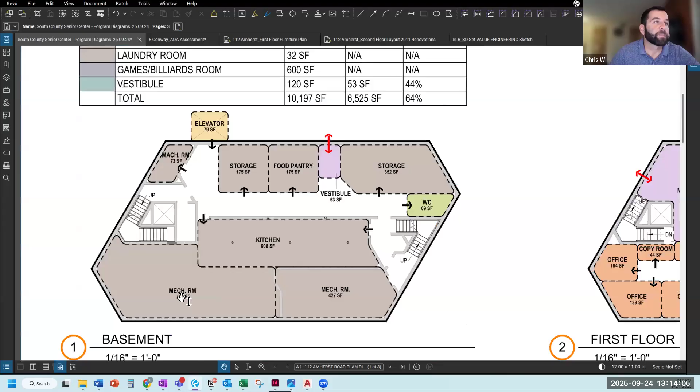So in the basement, the idea would be we would have some sort of kitchen, mechanical, storage capability that would fit out most of the basement. We could potentially put the food pantry in here.

But the big limiting factor down here that we were finding as we were starting to try to fit programmatic spaces in here is, again, just needing to put in more restrooms as soon as we start to put activity spaces in here. The basement only has one restroom. We feel like we could get away with that if it was mostly back of house staff spaces. But if we were to put a conference room down here that could fit 20 people or 15 people, all of a sudden the bathrooms start to become a little too limited.

So just this option, trying to keep it down, trying to find that fine line. But the basement, we were more or less trying to find the use for staff and for back of house uses mainly, with the exception of the food pantry.

You'll notice here that we are gesturing at potentially putting an elevator addition on the building. Our opinion is that if we need to go down the road of upgrading the elevator, it would be much more cost effective to put a small addition on for an elevator as opposed to tearing out the existing elevator and trying to expand the existing footprint. We've done that in the past, and it is not a cheap endeavor. We've done it for other reasons, whereas in this case it seems like there is a pretty good spot for an elevator to fit, and the site doesn't really restrict us.

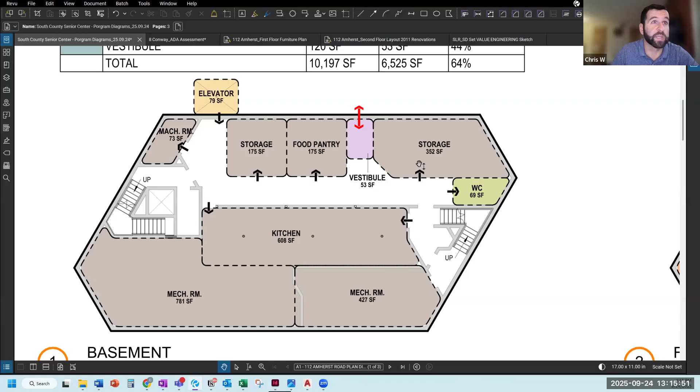So in this case, we would recommend putting something off the side of the building. And as you'll notice, when we go up through the building, it does seem to land in a pretty decent place for utility usage. So the idea here, like I said, is the basement's mostly staff. You go up to the first floor.

Before you move on - sure. How come, so with the mechanical rooms down below, when we had gone through before, was it not feasible to have the kitchen on the exterior section, like we talked about, in a smaller scale for that with the mechanical room?

I guess I'm not quite sure what those are for, because on the other end you have part of the storage room now for the water closet down on the right there on my screen. So I'm curious as to why that got moved that way.

I think in the end we can certainly push and pull the kitchen around, whether it's on the exterior or the interior. We haven't gotten into that level of detail with where it lands. I think just the point that it's in the basement is the main talking point I want to kick around. We can find a different home for it if it makes sense when we get into the nitty gritty, but the point of it being in the basement is what I want to focus on. It really requires over 1,000 square feet of mechanical space.

Some of the things that are labeled mechanical space were just like meeting rooms, with no mechanical stuff there. So what I'm hearing is that maybe this isn't the exact layout, but somehow there's going to be like 1,100, more than that, almost like 1,200 square feet of mechanical space that could be mechanical, utility, or storage. It's just kind of back-of-house space.

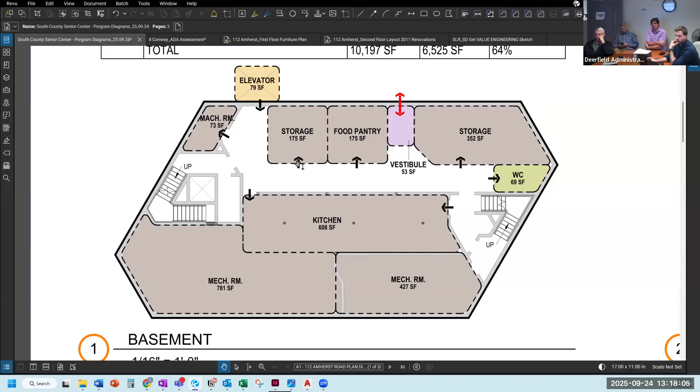So going upstairs, the idea here is the entry to the west would be considered the main entry. As you can kind of see here from the plan, we're assuming that the first floor is going to be made wide open. We were trying to save as much as we possibly could.

So the restrooms and the janitor's closet over here would remain, but everything else that you're looking at here was our best guess as to the best way to use the first floor.

So we were looking at a fairly open lobby where you could access restrooms as soon as you walk in. There could be a small waiting area, and you could have the elevator open directly into the lobby as well. There'd be a small staff area with reception accessible from the main lobby. So the main lobby gets you to restrooms and directly upstairs as well.

The stairs could remain open - you wouldn't have to close that stair off. We could fit 4 offices in here fairly comfortably, with a small copy area. Some additional bathrooms would be needed.

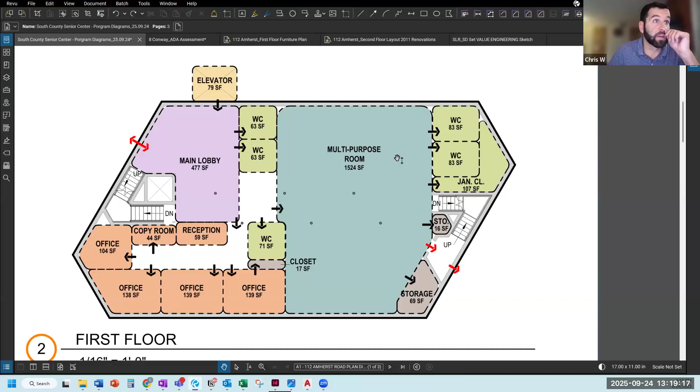We could potentially fit a decent sized multi-purpose room in here, about 1,500 square feet. The program called for, I believe, 2,400 square feet, so we're only at about 60-70% of what the program called for. But the idea here is kitchen in the basement, administration on the first floor, to be able to control that first entry point for folks coming into the building.

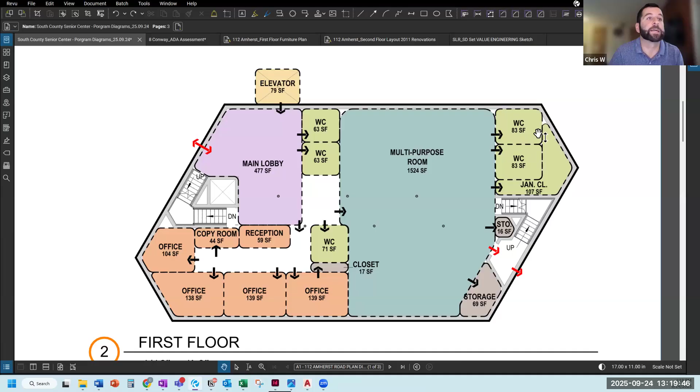Large multipurpose rooms connected to the kitchen as close as we possibly can, with most of the other activity spaces fit on the second floor.

So the second floor would have the elevator poking out into a corridor - a double loaded corridor connecting the staircases - and we can fit 3 decent sized activity spaces. We can chop them up however we want, with a 4th meeting space, but we've identified exercise, art/classroom, potentially a game room, and a fitness room. We could chop these spaces up however we want.

But the idea was that maybe we put all the other activity spaces upstairs, the main event spaces downstairs, to try to stay as closely connected to the administration area as possible and the kitchen as possible.

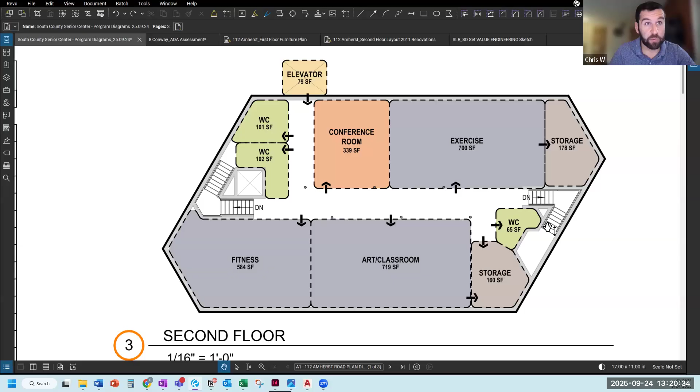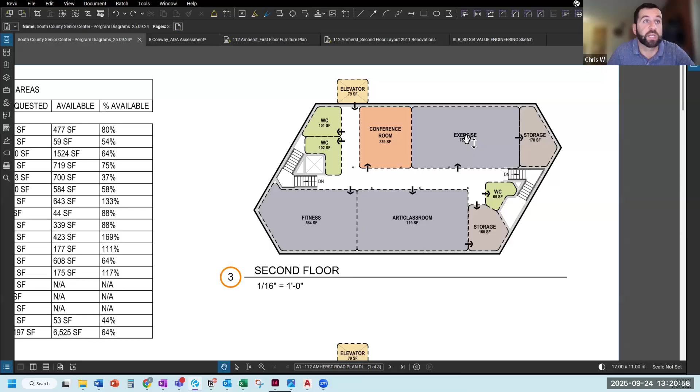Upstairs, we have 3 single-use restrooms. 2 of them are existing, more or less in the same location. We have to add 1 just to accommodate all the different bodies that would be up here. So again, we're looking at an option of how we could fit as many activity spaces as possible. In this iteration, we looked at what it would look like if we put a lot of them upstairs. Not to say that's the right thing to do, just looking at different options.

We put a chart in here too, and we can go through these one by one if you want, but from a comparison standpoint, we wanted to look at what the program called for and what available space we're identifying in this option. For instance, we called for 2,400 square feet for the multipurpose room, and availability is about 1,500 square feet, giving us about 64% availability of square footage for that space.

For instance, the game room—I mentioned one of the rooms could double as a game room—but we identified a separate game billiards room at about 600 square feet. According to the current layout, there's no room for it. So this chart is mainly to help everybody understand how this layout compares to what the program was originally calling for.

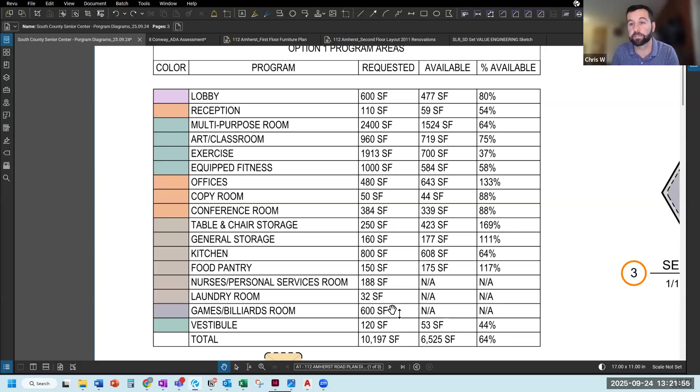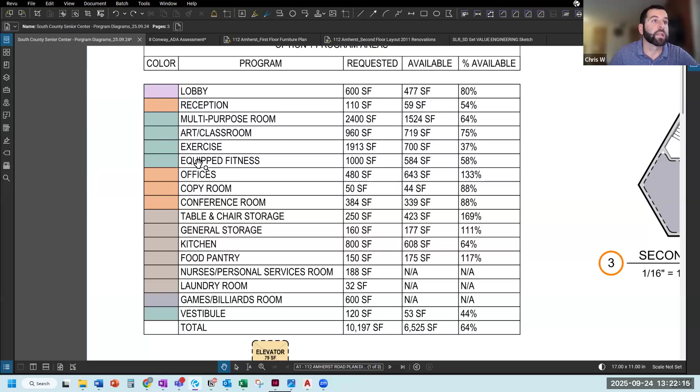Right, so you're saying, can you go back to that little chart? You're saying there's only 6,525 square feet out of a 12,000 square foot building available. I'm saying that of all the activity spaces listed here in the program, we added up to about 6,500 square feet.

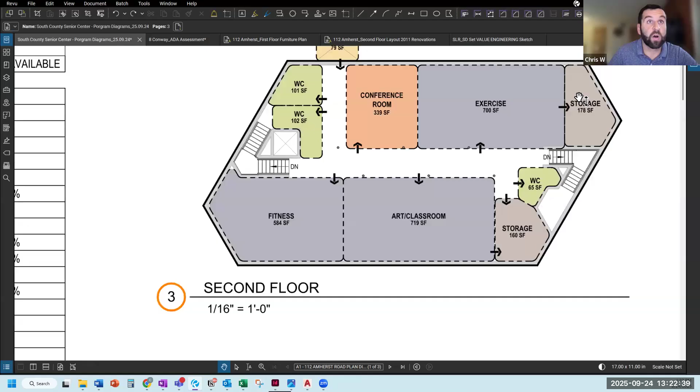Well, where did the other 5,475 square feet go? There's corridors, there's stairs, there's the elevator, there's all this storage and mechanical space that's not really called out. So it adds up in the end, but basically all of these purple and orange areas—the bathrooms aren't called out here in this area as well. So that's just how the numbers added up when trying to squeeze in all the different pieces and parts.

If we were to utilize the basement for program spaces, obviously that changes the math. We'd get a lot more floor space back, but that's just what the math is based on this conceptual layout.

Yeah, I mean when we were looking at the other two, when you did the feasibility study before, we didn't have this much mechanical room space in either of those. And that added a whole new kitchen.

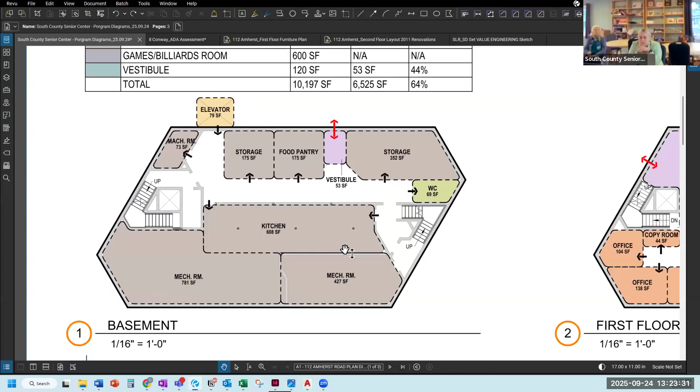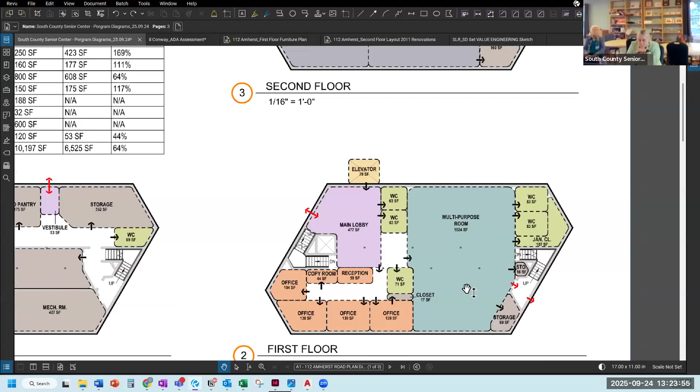Can you go back to the top floor for a second, please, since we don't have copies of this yet? Between the art classroom, which was not that big, we had a larger movement room, and we don't need that big of a conference room. If we've got a big lobby downstairs, we can go to the main floor where our staff offices would be. We don't have a nurse's office, which could be the fourth office there, and that could be moved closer to a bathroom.

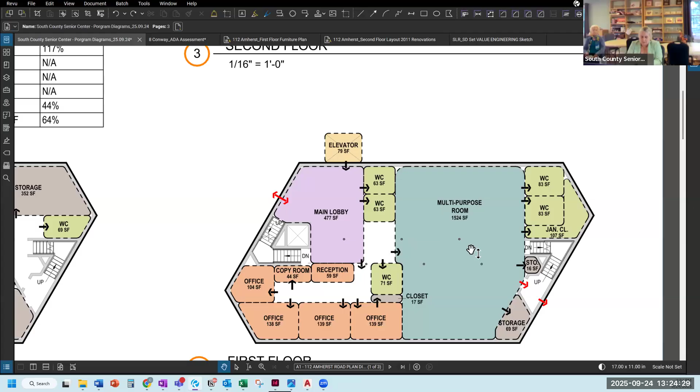And you could put a conference room somewhere in there. I mean, the other studies you did were—and I know this is only a short turnaround time given that we didn't get the contract, there was a delay—I feel like we could definitely make much better use of redoing this compared to before, when we did the other two spaces for Whately and for Deerfield.

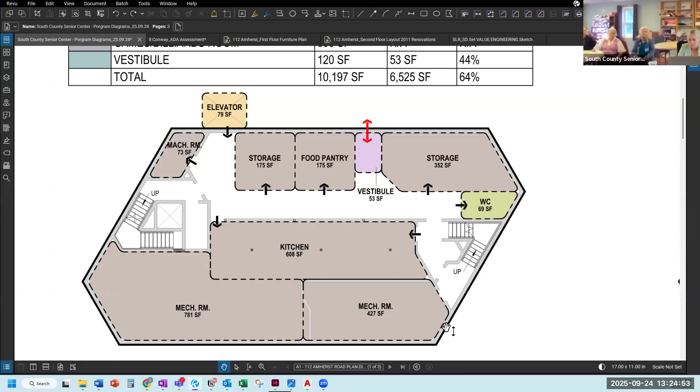Yeah, I mean we can certainly push and pull some spaces around on the first and second floor. I would just say the basement is the basement—I don't know, unless we're going to start putting large activity spaces down there. No, we weren't planning on it. We were planning on using the multi-purpose room, as we discussed during the walkthrough the other week, whether it was on the top floor or the first floor, to move the food stuff up there to help with that.

One of the purposes of the multi-purpose room could be exercise—for example, you don't need a separate exercise room. Although the fitness area, which would have stationary machines, might be something that does need its own space.

The point of this diagram was to show that there are a lot of sacrifices that will have to be made. We can debate whether we have exercise or fitness space, whether everything fits in two large multi-purpose rooms. There are definitely deficiencies, and we doubled table and chair storage from 250 to 423 square feet, so we could reduce that by half.

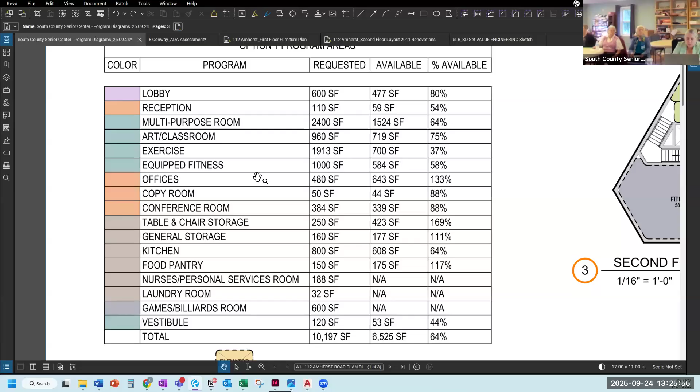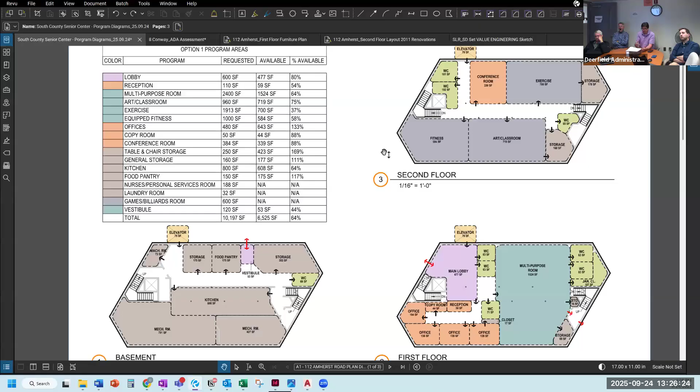This is really rough, just a first look from the first meeting. Maybe when Jennifer gets this in an email she could sketch out what she'd rather have here versus there. If we do anything in the basement, that's a lot of square footage in the building we're not using because of what it is, though maybe we put another bathroom down there for more flexibility in program space. At least this gives us an idea, and Jennifer could cut out what she thinks she'd like to see.

We could circle back on this because we can move all those pieces around. Like Jennifer said, we definitely want a nurse's office next to a bathroom. She can sketch out what she thinks should go where, and then feed that information back to Chris.

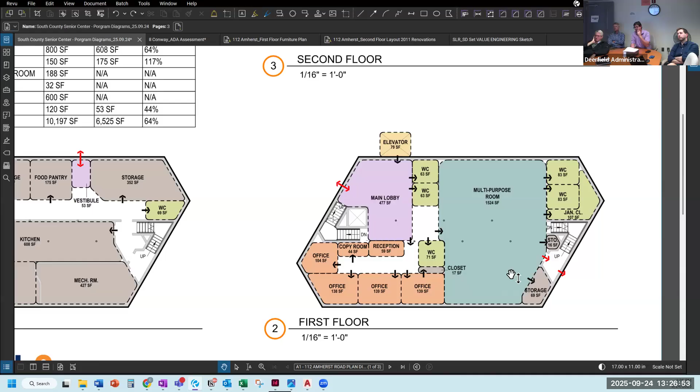I think the big picture today is to try to get a magnitude of this project to see if we can move it forward. We really shouldn't be talking about whether the bathroom's on the left or the right. We've got to move on and get a sense of what this is going to cost to see if it can even fly.

I agree. I am a little dismayed that what's nominally a 12,000 square foot building really only has half of that as usable space. I question that, but given this is a sort of 10,000 foot high view, that question can be dealt with another time.

Any other questions on this? What did you come up with for cost analysis on the two big options: adding the elevator on the exterior versus getting a waiver, plus the sprinkler system? As part of this study, the whole point was to put together a much more descriptive cost estimate, but we haven't had time to pull that together or even review this with you, so there are some discrepancies. But for this discussion, as Lorin said, big picture, very rough numbers.

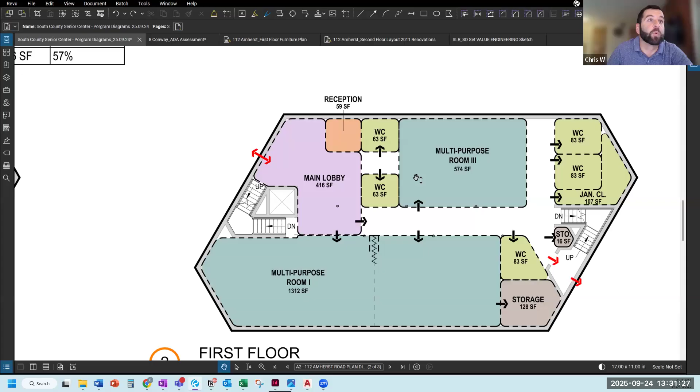With the upstairs being all staff, we would leave upstairs as is. Essentially we wouldn't touch any of the walls, and we wouldn't allow any of the public up there. This is a rough layout of what's existing. We would just live with where the bathrooms are, where the storage is, the open office area. We could put tables and chairs out if we want, but it seems like there'd be plenty of staff space up there as is without really needing to add anything additional.

But if we were to add a conference room or anything like that, it gets a little tricky, because as soon as you do that, the state access board could potentially look at that and say, well, if you're going to have a conference room up there and people need to meet with staff, then maybe they're going to be going upstairs. So we just want to be sensitive about what we're putting upstairs, because that could play into a role in what the access board does or doesn't decide to do with an elevator variance.

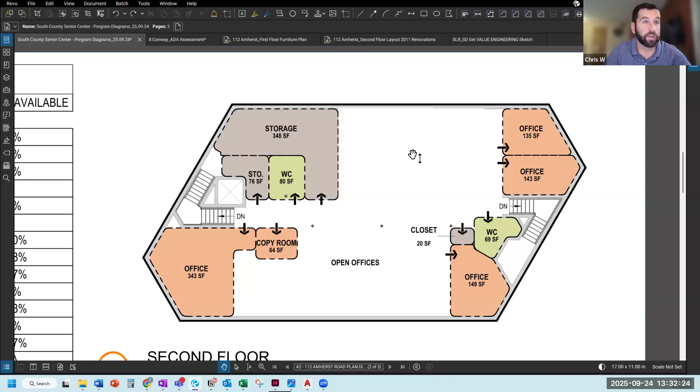In this option, we'd be looking at doing nothing to the elevators. Chris, when you get into this later for more solid figures, will you have like, an elevator is roughly this price if we put it on the side? So we could pick and choose and figure out how we wanted to mix things up.

So we know, okay, sprinklers are roughly this much, elevators roughly this much, kitchens roughly this much. Okay, great. So that we could tap into later and maybe version these two plans together.

Chris, in this scenario, then the center would not be able to utilize volunteers to move food from the commercial kitchen to the service area on the first floor. Is that correct?

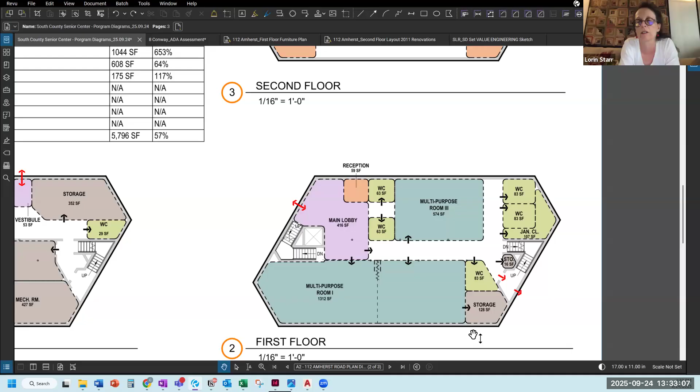Volunteers technically would fall under the staff category. So you could get away with having folks bring stuff from downstairs upstairs. The elevator, like we said, is not accessible, but it's functional - you could use it kind of as a dumbwaiter, bringing stuff up and down the floors. So technically, volunteers we could say are staff, and we wouldn't fall under that accessibility category.

And then it's the same conversation here - what could we potentially put in the basement? Could we put more bathrooms down there and try to squeeze in an activity space along that exterior wall? Yeah, we definitely could, but it's just adding more cost the more bathrooms we use.

Does the kitchen want to flip against the exterior wall? We could certainly look at doing that. The food pantry, as we mentioned, makes sense to fit in there along the exterior wall for access. So, could we look at skinning that a little bit differently?

Yep, definitely. But there's definitely some restrictions there regarding how many bodies we can actually have down there. But from an accessibility standpoint, to Joyce's point earlier, it's at grade, so it could be considered an accessible floor, and we wouldn't really need to mess with any elevator component. But from an optics standpoint, having somebody in an activity upstairs and then having to send them outside to get to the basement - it's not the best.

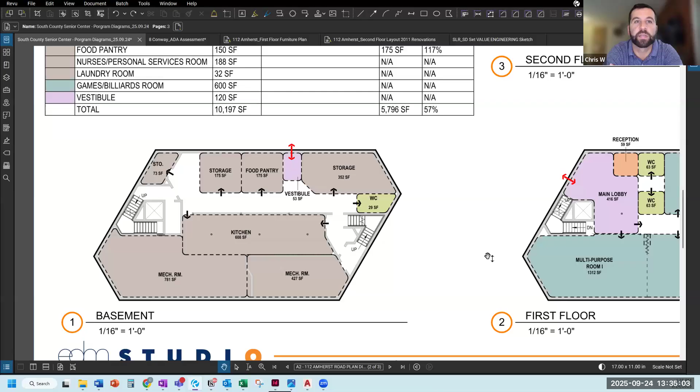Same thing as the first option, Jen, you and I got to look at this and get into it in more detail. But this was just roughly how much space we think we can fit in this area here. Yeah, could you go to the second floor on this one again?

I think when you look at the other one, where you talk about putting the elevator on the exterior, it's a moot point. I mean, you can fit 4 people standing, 1 person sitting and whatnot.

And if you look at the 521 CMR, if you ask for a variance on that, we're not negating people going up and down. At the previous senior center that we were at for over 20 years, there was no elevator. It was just people's ability to go up and down stairs, and the stairwells that are currently existing are large enough for people to walk up and down. The Whately Town Hall that we currently use just has a lift.

So asking for a variance is not out of the question, in my opinion, and I think would be better. But Jennifer, I think what Chris is saying is that even with a variance, you will not be allowed to have the public on the second floor. That's what you're gonna have to tell them. I think what Chris is saying is that you would be telling the access board that you're limiting the second floor to staff, unless you ask for a variance for the public, which is gonna be trickier to get, is what I'm hearing him say.

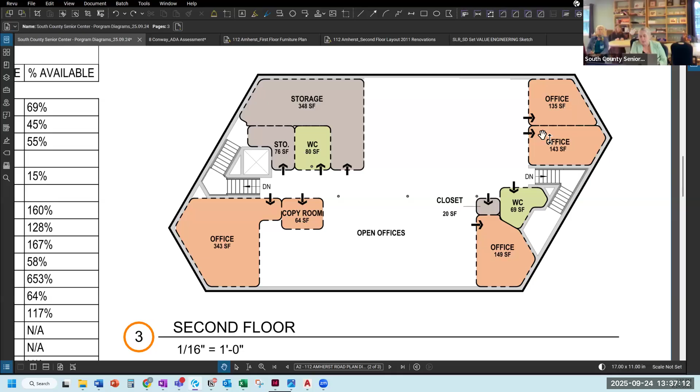If you go back to your other presentation that you had for the second floor, you've got movement classes. And I don't say this to be disrespectful, but the majority of our folks who are participating in our enhanced fitness class are fully able-bodied with minor modifications. So we're not putting people upstairs on that second or top floor who don't have the ability to go up and down stairs or use a smaller wheelchair.

And I know that is not what the code is, and I'm well aware of the ADA profile, but with limitations, you're still limiting the population that's going upstairs and having the main multi-purpose room be where the majority of the activity would be, where small classes would be on the top floor. And it could be flipped either way.

What did you have for a magnitude on the phase two, option two, Chris? Maybe you haven't done one yet either, just like... This one with the kitchen and the sprinklers, and renovating the first floor with some mechanical spaces and adding of the bathrooms is definitely significantly less. It's still gonna most likely be in the $2-3 million range.

So it's half, it's a good amount less, but I know everybody wants to hear smaller numbers, and so do I on all these projects, but just the way construction is these days, it's hard to do anything for small numbers. So even a $3 million project is a pretty small project when we're talking prevailing wages in Massachusetts, chapter 149. It starts to add up quickly. So I know nobody wants to hear these numbers, but those are what we're seeing.

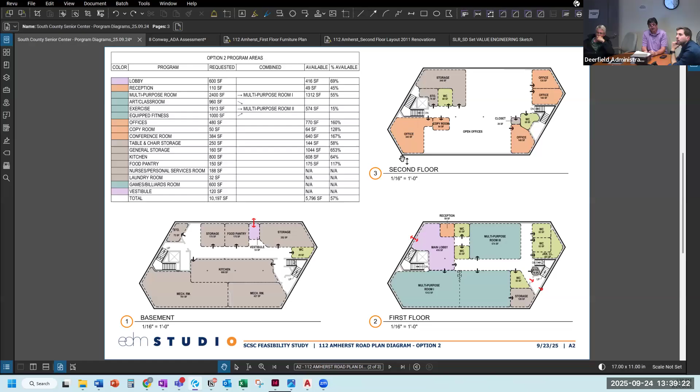Okay, so Chris, just to reiterate on scheme 2, the $2 to $3 million scheme, one could put in the variance trying to make a case for the use of the second floor, but that could be rejected. And then if you wanted to proceed, you would be really limiting the second floor to office space.

Do you put in a variance request before we went out and started this project? Because before we ask the town for a certain number, some $1 million somewhere, we got to know what is available, what is not. At what time frame do you do a request for variance?

Typically it's on a project early on, but in my experience, and this is just the projects that I've done variances on, the building was already owned by the client. So this one's a little different, where you guys have to decide do we buy this building or not. All I can do is give you our experience with the variance process. If you limit where the public's going, you have a pretty good chance. But once you say we're going to put the public on the second floor and we're not going to give them an accessible elevator, things get a little squirrelier, and I can't say one way or the other if they'd accept it. But yes, we would want to do it very early on in the process to make sure nobody's going down a path that ultimately we can't go down.

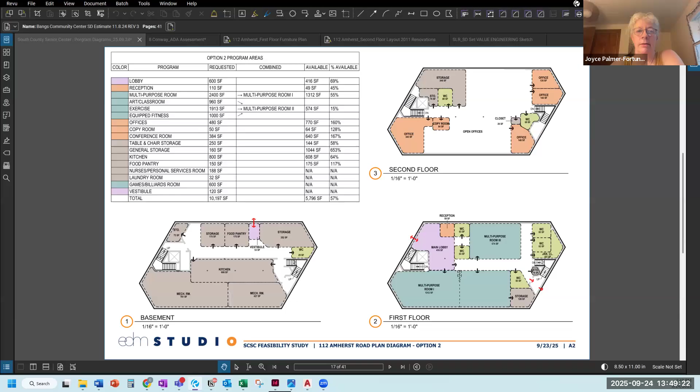My thinking about this is, when you say the value of the building, I almost feel like if you were gonna do this kind of project, we'd probably wanna buy the building. I don't wanna invest that kind of money in a building that somebody else owns. I would think that we'd wanna own the building and then do the work, and that way it's ours. I don't wanna put that kind of money into work in a building we don't own, and then the lease payment, we'd need to do a 50-year lease just to make it affordable.

And to me, the lease was the most attractive part of this. Right, that we could do a lease to own, that kind of thing too, but it still needs to be lease to own the building plus the capital outlay, which we could do. We could debt exclude that.

But yeah, I mean, Lauren, I think Jennifer's right, your camera's in your ear. Lauren, can you turn your camera off, please? Thanks. Whatever we had to do there or do here, like you said, either place, we gotta do all that work.

So we'll be curious to see what 8 Conway Street magnitude looks like as well. I don't, probably not much different. And 8 Conway Street is many years away as well.